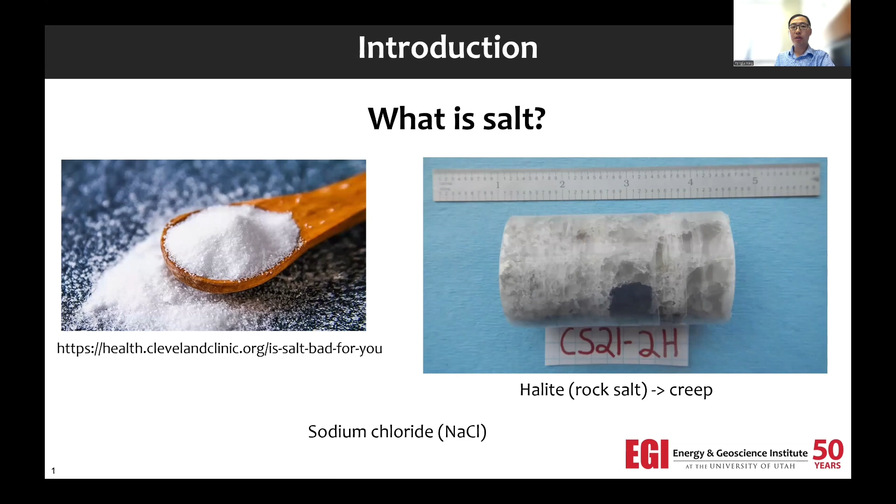So first question, what is salt? Is it what we eat every day? Yes it is, but it's in the form of rock. We call it halite or rock salt. Its major component is the same as what we eat every day - sodium chloride, NaCl. One of the most important features of rock salt is that it's easy to creep compared to other rocks.

Here is the Paradox Basin. It's in Utah and Colorado, and the area we investigate is in Utah. One unique thing about this Paradox Basin is that it has a setting of salt-clastic cycles. If you look at this figure, you can see this layer of salt, then followed by a clastic, another salt, a clastic, and repeating like this. So we talked about salt, halite, before. The clastic is composed of sandstone, siltstone, mudstone, etc, as well as usually where hydrocarbon forms.

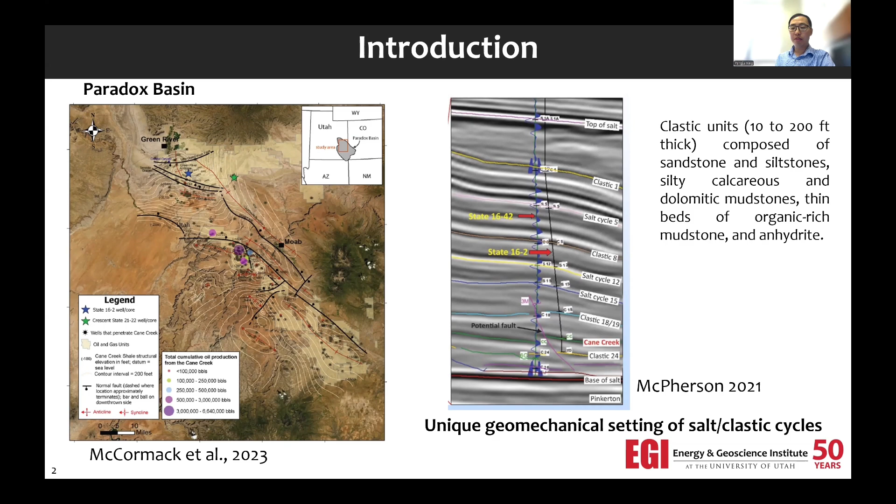Due to the unique setting of these salt clastic cycles, there are a lot of drilling programs. Here we investigate the one well drilled in this basin, and this project is supported by DOE, and some of the funding is going into the drilling of this well.

So we can see that there are drilling issues during drilling the well. After 23 days of spud, there's drill pipe stuck at 6,022 feet, and they start to drill a sidetrack. The sidetrack means they drill another branch. But after drilling the sidetrack at day 43, only 2 days later, the pipe got stuck again at 9,273 feet.

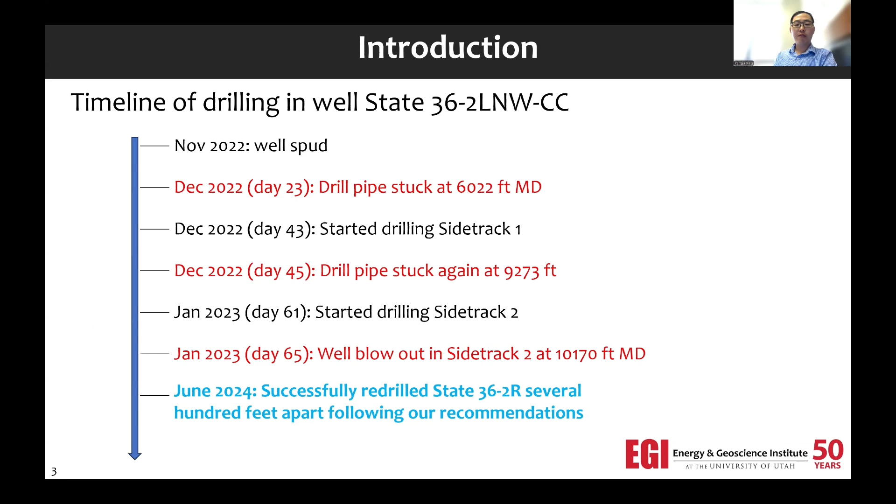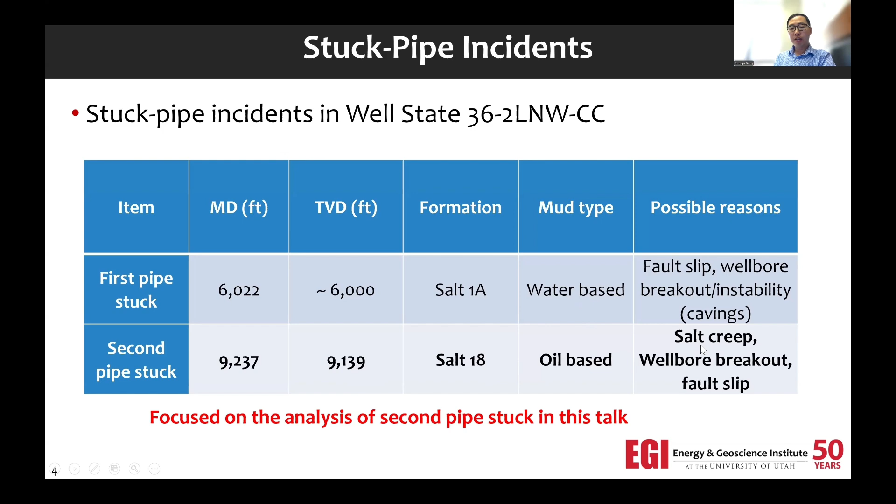So basically there are 2 pipe stuck incidents in this well, as I mentioned. The first one is happening at 6,000 feet, and the second one is deeper, around 9,139 feet TVD. They use 2 different mud types - the first one is water-based mud, and the second one is oil-based mud. Here we focus on the analysis of the second pipe stuck in this talk.

This figure shows the drilling during the second pipe stuck. You can see the salt clastic layers, and the pipe stuck at salt 18, and we believe there are three mechanisms that can contribute to the pipe stuck.

The first one is borehole creep or shrinkage. The borehole shrinkage means the borehole size becomes smaller, and then it causes pipe stop. The borehole shrinkage is caused by the salt creep. The second one is wellbore breakouts - when under compression, your breakouts produce some small pieces of rock that fall into the well, and if it can jam the well, it causes pipe stop.

And the third is fault slip. Somehow the structure, when it interacts with the drilling, it can easily slip and cause the pipe stop.

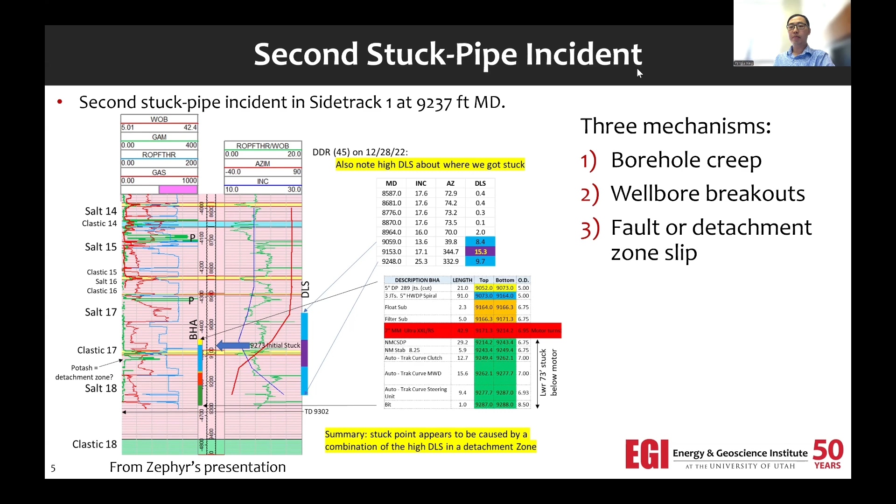First we can look at one of the drilling parameters during drilling - it's the PVT total mud. The PVT total mud means the mud, they monitor the mud at the surface. Ideally, as you're circulating the mud, you shouldn't gain too much or lose too much. But here, starting from 8,700 feet, you start to gain a lot of mud, meaning something happened.

Presuming the calibration is correct, the gain may suggest the borehole shrinkage - the borehole becomes smaller, then squeezes the mud out. This can be due to the creep, or it could also be another reason, like you enter a zone with some fluid coming out. But creep is one of the reasons we call this.

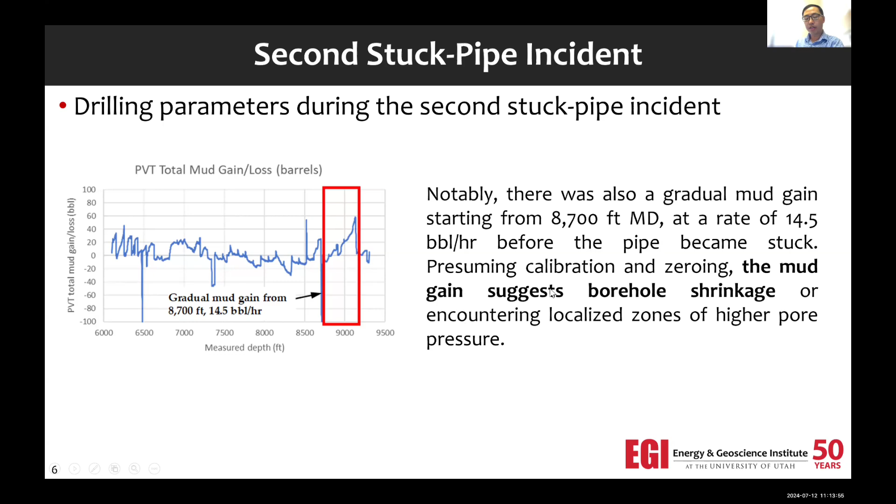Here is one 1D very simple analytic solution. You can calculate the borehole shrinkage. So R is the current radius, and R0 is the original radius, and here it's related to your creep.

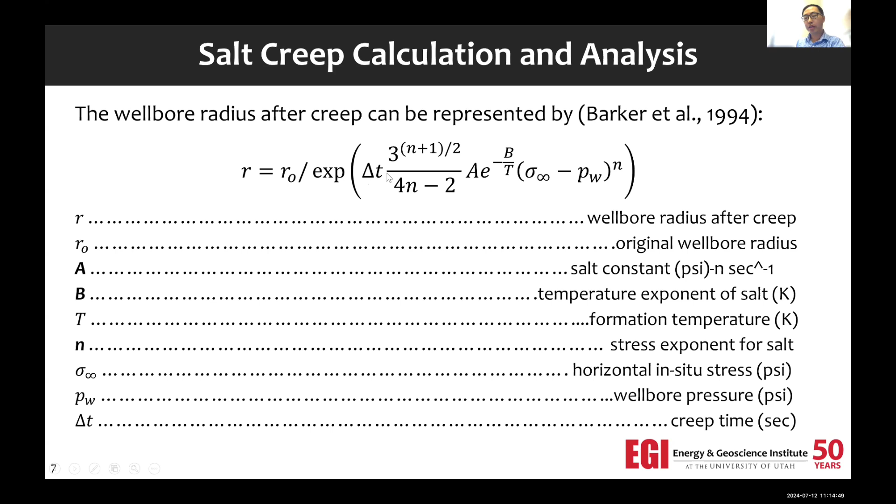So A, B, N are related to the salt properties. A and B are related to temperature, N is related to stress. Delta is creep time. This sigma is in-situ stress, and PW is wellbore pressure. So basically, you can calculate how much your well will shrink based on these parameters.

But first thing is you have to determine the constants A, B, N that are related to salt properties. But we don't have any core samples in this well. Fortunately we have lab creep tests for the cores from the nearby wells.

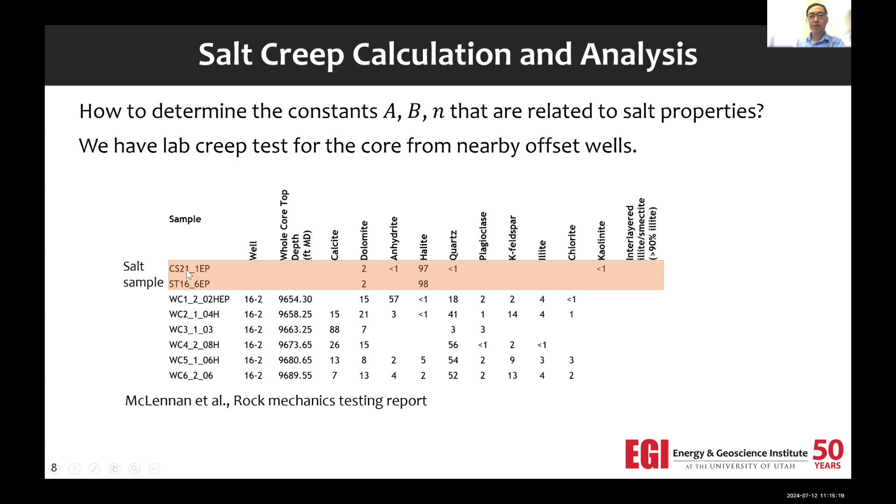We have two samples, they did the creep test. Here's some data from one of the samples. How is the creep test done? Basically, first you apply a 600 psi confining pressure, then you do multiple cycles.

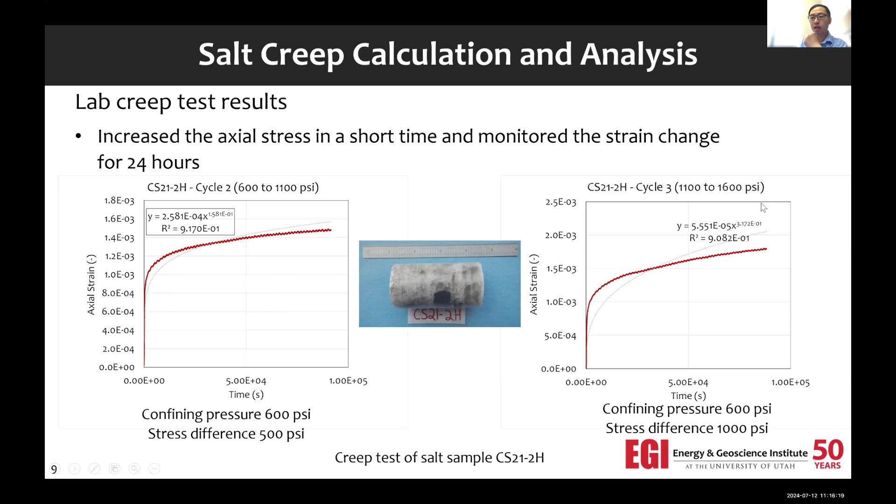In the first cycle, you increase axial stress from 600 psi to 1,100 psi in a very short time, so the stress difference is 500 psi. Then you keep the stress constant and wait, monitoring 24 hours for the strain change. In the next cycle, you increase axial stress from 1,100 to 1,600, then wait another 24 hours and repeat.

So we have this from stress difference of 500 psi up to 4,000 psi, and you get this data. The creep strain can be expressed like this. We know the strain rate, we know the stress, and we know the temperature when we did the experiments.

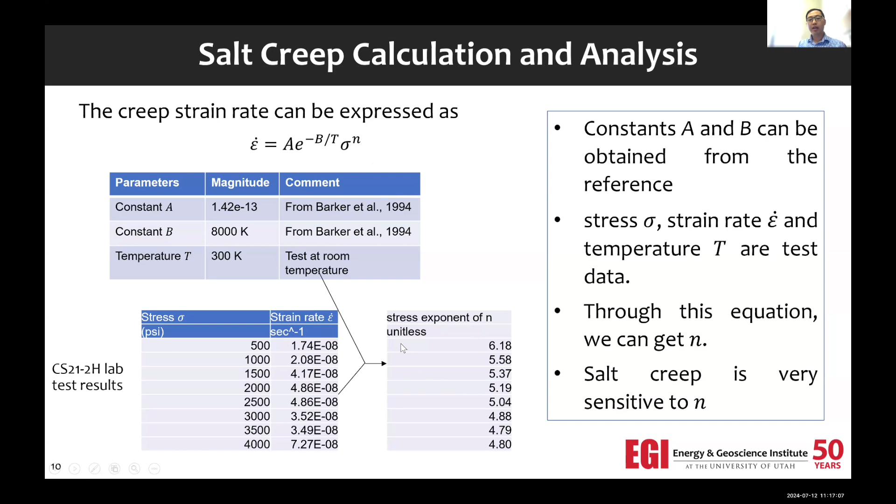A and B I just copied from the reference, and the only thing we can calculate is N, the stress exponent. You see it's a power law, so it's very sensitive to this, but we can calculate it based on this experiment data.

Then we substitute these parameters back into this equation. With A, B, N -- N is related to your stress difference level, and because we have different stress difference levels, we calculate N based on this stress difference.

We just do some interpolation, and also the temperature here is the reservoir temperature, which can reach 170 degrees F. So after you substitute all these parameters in, what you get is the current wellbore radius is only 90% of the original one. So it can shrink from 8.5 inch to 7.6 inch at this 9,000 foot TVD, so 10% shrinkage.

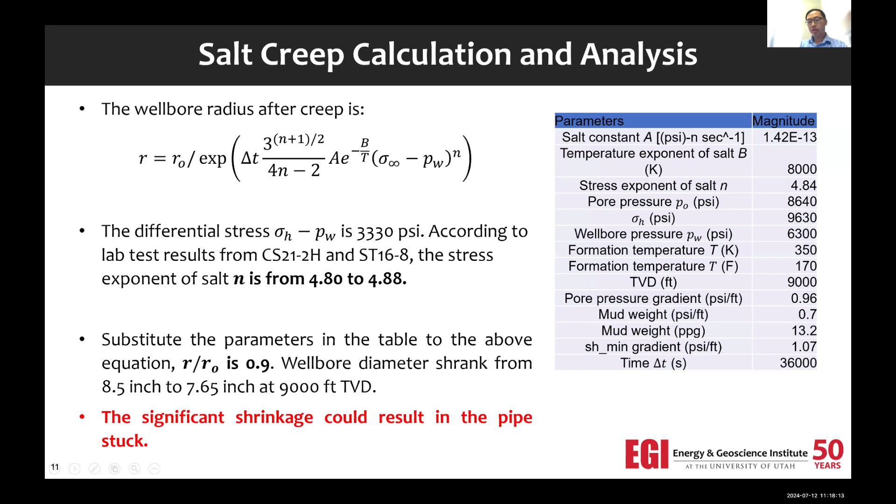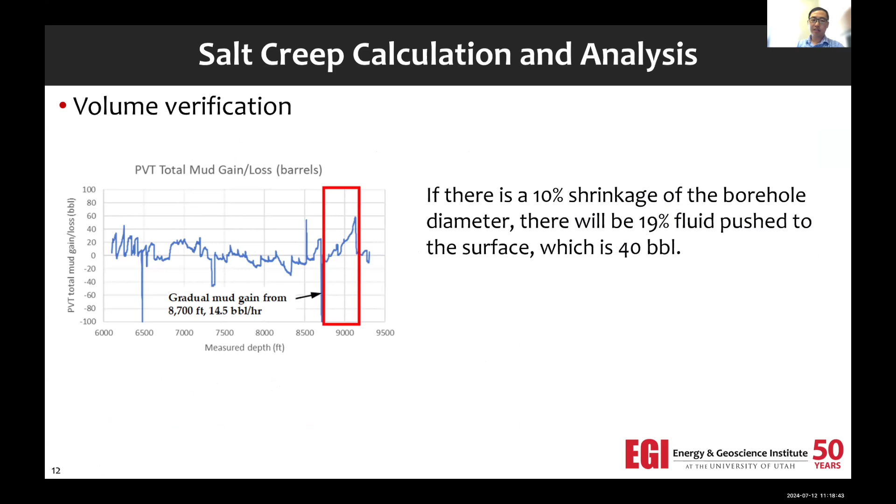So this could result in the pipe getting stuck. And if we go back to the chart I showed before, we see there's about 60 barrels mud gain, and I calculate the volume. If 10% radius shrinkage will cause 19% fluid to be pushed out to surface, which is around 40 barrels -- so yeah, just to cross-validate each other.

So next, if I set a threshold -- if you have 10% shrinkage, you have a problem -- then what mud weight do you need to prevent this 10% shrinkage? This chart can answer this question.

So this solid line is the creep, the mud weight required at different temperature levels. The higher the temperature, the more severe the creep. The red one -- the real temperature at 9,000 feet is 170, so the blue line is 170 degrees F.

So this is the required value, and the dashed line is what was actually used. The actual mud weight used at this 9,000 foot TVD is 13, but what is required on the blue line is about 13.4, so it's lower than the required value, and that's why this could cause a problem.

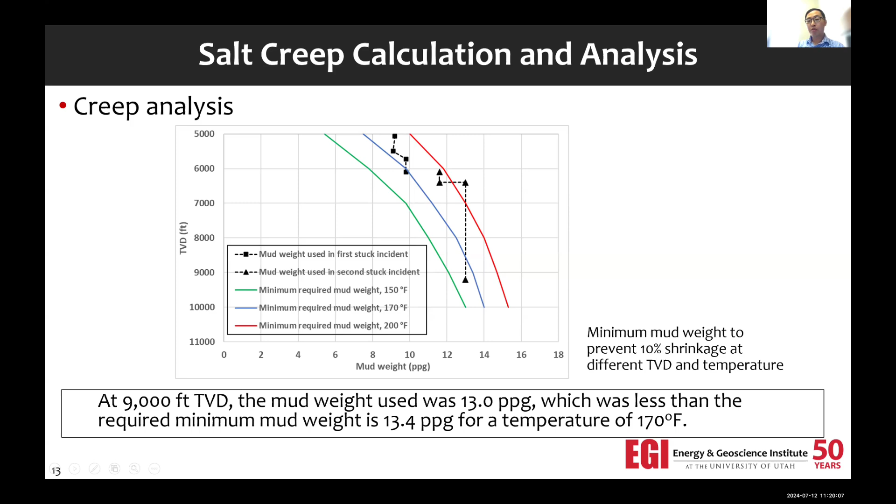So the previous analysis was based on the creep equation and the lab data. Next we also have a lot of data from the nearby offset wells, and the amount of creep is related to the actual mud weight. So if you put more mud weight, you have more support, then you have less creep.

So we have this data, and also we have the caliper data. The caliper data is -- when they finish the hole, they put a tool down hole, and they can measure the size of the borehole.

Here is the plot. The vertical axis is the ratio of the borehole size over the drill bit size.

The drill bit size is the original size. You drill it at original size, but due to some reason, like creep, the actual size becomes smaller. So R0 is the base size, the original size of the borehole, and R is the current one.

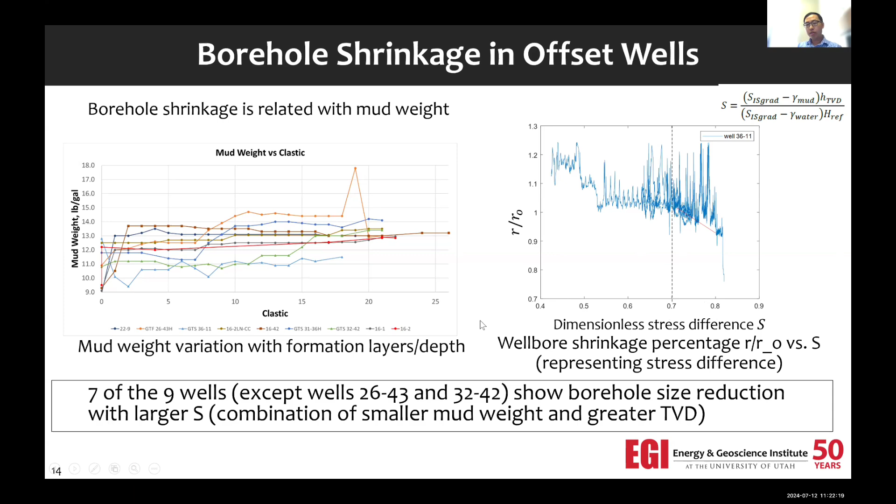As you increase S, you can see a clear trend: the borehole is reduced in size. For nine of the wells we have this data, seven of them show this size reduction.

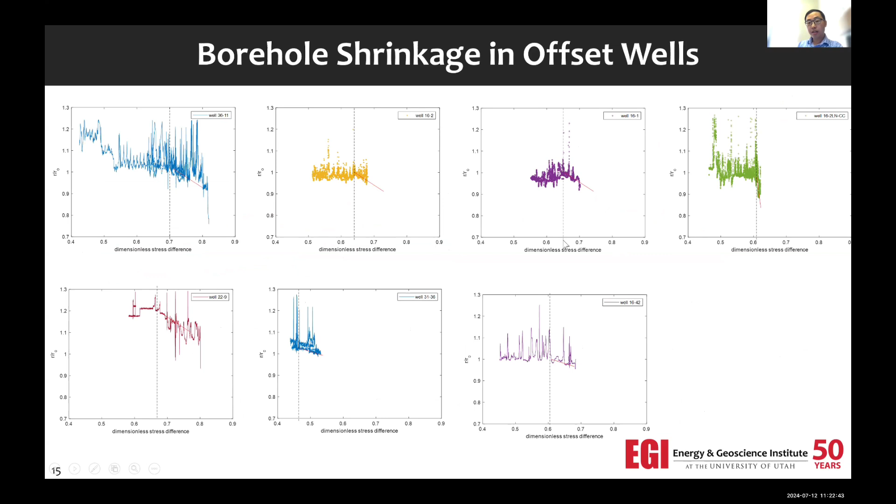I put these seven here. They all show that once S exceeds some value, they all have a reduction in borehole size. This is highly due to creep.

If you set a criteria saying we don't want this size reduction, and we want this ratio smaller than 0.6, then we have this plot showing the minimum amount of mud weight to keep S smaller than 0.6, at 9,000 foot TVD.

The required amount is 13.2, and remember what we calculated before was 13.4. What we actually used was 13. So the used value is not too much lower than required, but it's still lower.

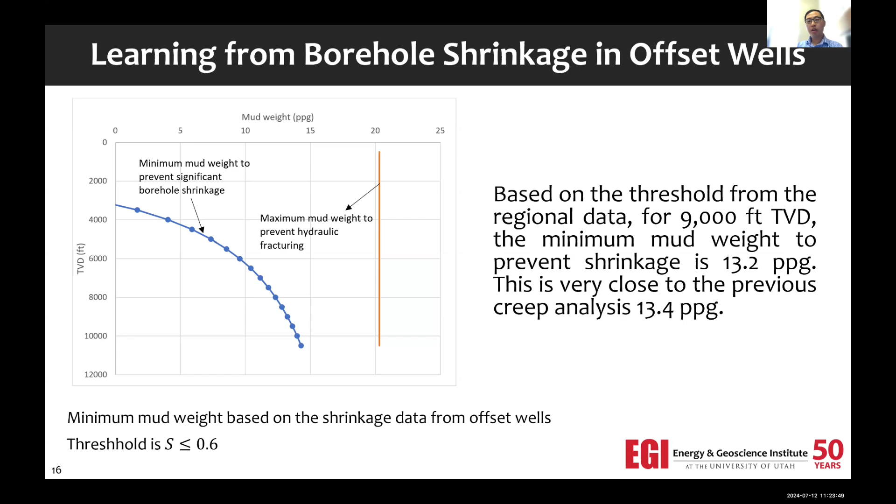If you consider the uncertainty, it could give you some problems and cause borehole shrinkage and stuck pipe.

The next possibility is breakout. Look at this figure. Under compression, these breakouts happen.

Small pieces of rock could fall into the hole and jam it. But it's salt, which is pretty ductile. However, salt also has low strength compared to other rocks.

The UCS we measured in the lab is only 3,600 psi. Typical rock has close to 10,000 psi, so it's relatively low strength. So breakout could happen.

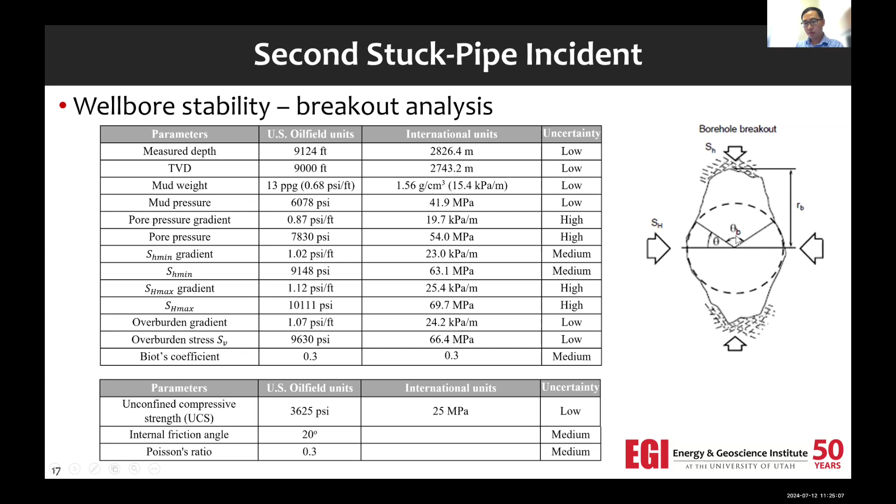Then we calculate the breakout angle. The breakout angle means this angle here. The larger this angle, the more severe the breakout could be. So we calculated the breakout angle.

Here we show two scenarios with two different Biot's coefficients, one 0.3, another 0.4, typical values for this kind of rock. It's very sensitive to the Biot's coefficient.

If the coefficient is 0.3, the breakout width is around 70 to 80 degrees. If the Biot's coefficient is 0.4, it could increase to 100 degrees.

We set a failure threshold of 75 degrees. If the breakout width is greater than 75 degrees, it could be a problem in a vertical well, and 60 degrees for a horizontal well. The horizontal well has a lower threshold because it's difficult to carry out all the cuttings.

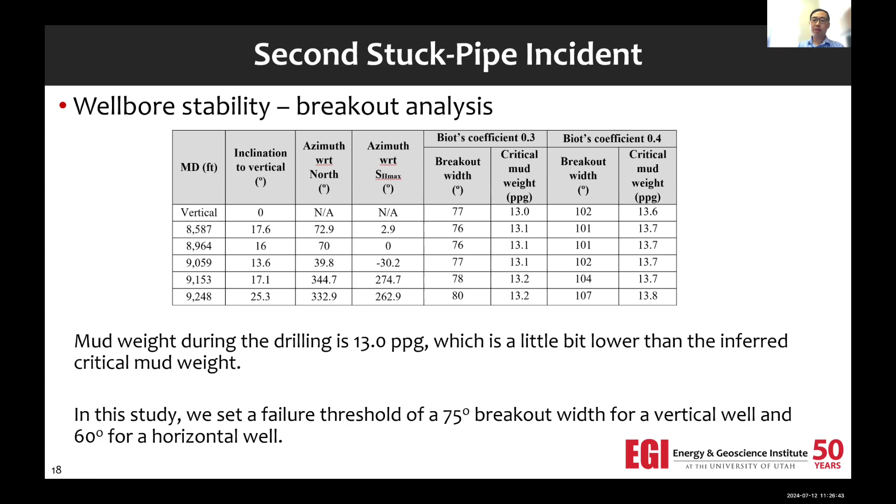So again, if the Biot's coefficient is 0.3, the critical mud weight is around 13. But considering some uncertainties, you still want to put your mud weight higher than this to keep it safe.

The third reason is fault slip. Here we can see there are some fractures intersecting with faults, inferred from seismic data, intersecting with the well.

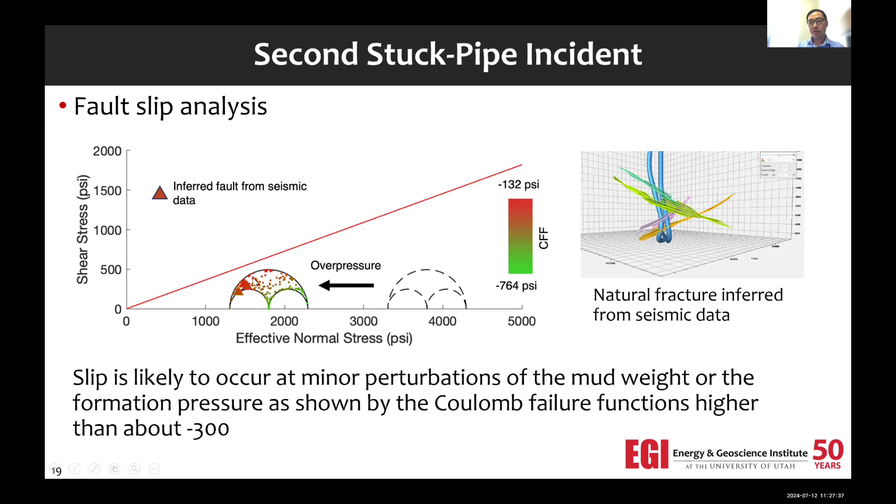My colleague Kevin McCormick applied this chart. The triangle here represents the azimuths of these fractures, and it's in a more dangerous zone. If it coincides with a higher pore pressure zone, it's easier for these fractures to slip.

So yes, let's come to conclusions. The three mechanisms, salt creep, wellbore breakouts, and fault slip, are all potential individual or collaborative contributors to the well instability experienced in the stuck pipe incidents.

We don't know which one is the real reason, to be honest, but we believe all three can be contributing, either individually or collaboratively. We just don't know, so we put all the things together.

But the important thing is that all three failure mechanisms are associated with lower mud weight. Analyses show that the minimum required mud weight is above 13 ppg, pound per gallon, and the actual used is 13. But you have to consider the uncertainties of all these analyses.

So we recommend increasing the mud weight to 14 pound per gallon at the deeper location, and it will mitigate the risk of well instability. If you increase mud weight, you have more support, your borehole shrinkage will reduce, the breakouts can be reduced, and the fault slip can be reduced.

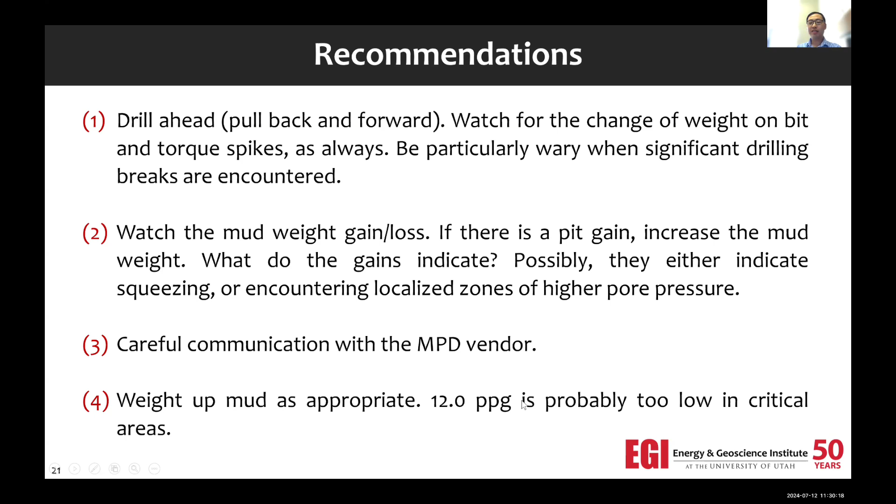And careful communication with the MPD vendor, MPD being managed pressure drilling, and weight up as appropriate. 13, 12 is not high enough.

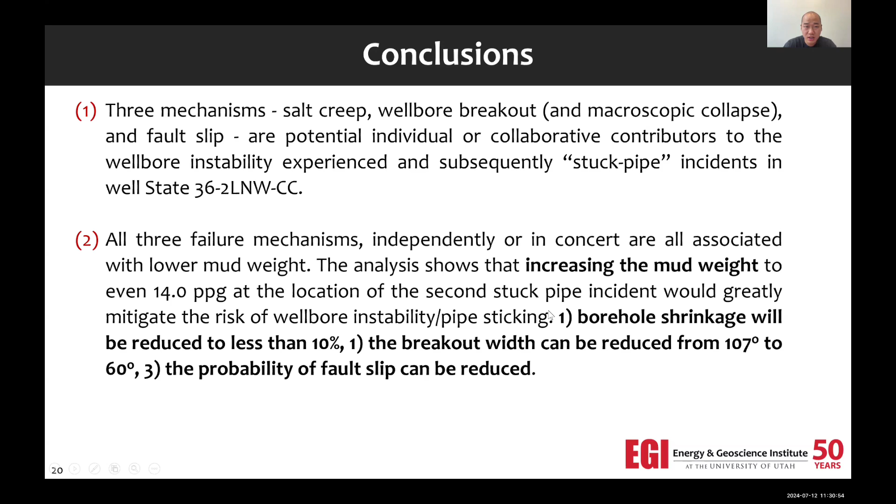All right, thank you, Dr. Xing, for this very nice presentation. We have a question in the chat from Umesh Prasad. Would you like to unmute yourself and ask, or you want me to read out the question? Yes, my name is Umesh Prasad, just by the way.

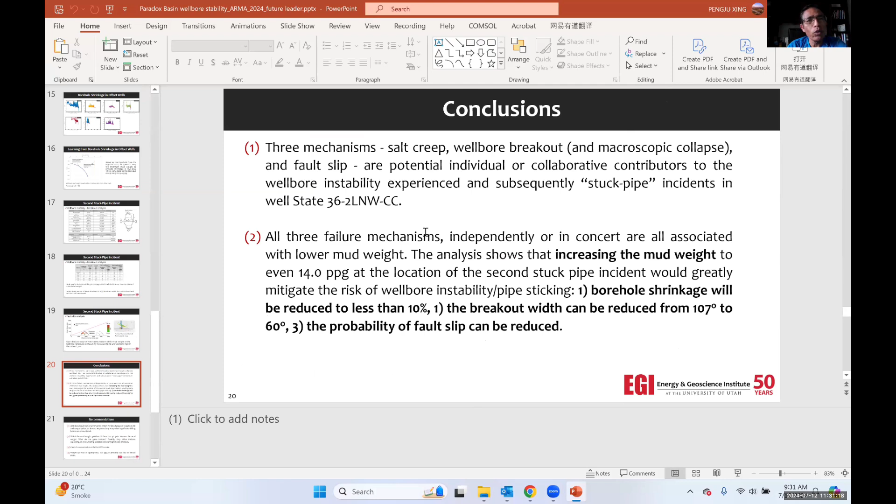Okay, my question was, in the salt, sometimes we see dissolution. In one of the two wells you mentioned, one was drilled by water-based mud and the other one, yeah, water-based. So was there any dissolution instead of shrinkage or creep?

Very good question. So in the first stuck pipe incident, we think it used water-based mud. We think that because the circulation rate is low, so we assume that when you dissolve the salt, it's in some part, because it's not uniform salt, it's salt clastic. So at the boundary, there's maybe some pieces of rock falling into the hole, so-called cavings.

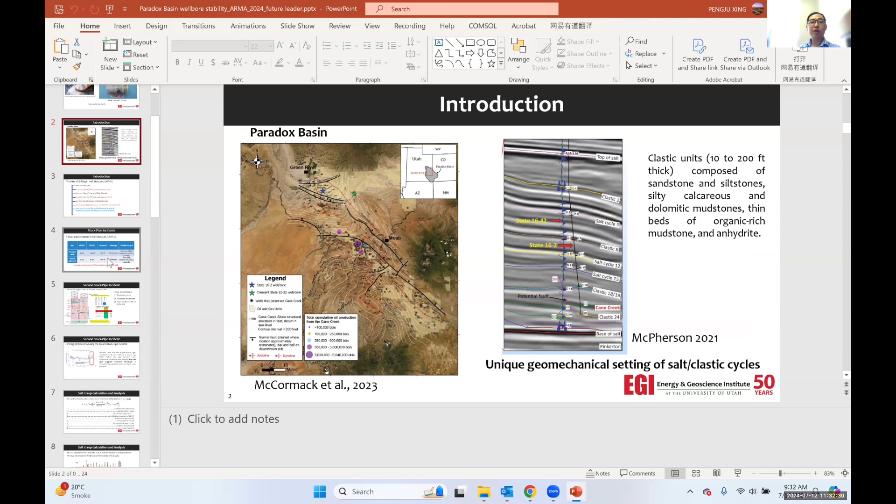And that's fine. It has low circulation rate, and it may not have enough power to carry these cavings out. So this is probably the reason for the first stuck pipe incident.

Yeah, another quick question on cavings, also put in the chat, was: conventionally in the lateral section, for example, Mark Zoback's book considers the threshold level of breakout as 30 degrees, but you assumed 60 degrees. Was there any reason that you may be able to evacuate those breakouts or cuttings? Why did you use 60 degrees instead of 30 degrees?

You mean in Zoback's book it's 30 degrees? Yeah, usually, petroleum geomechanics says in the vertical well your threshold should be 90 degrees, but in lateral, 30 degrees. But in your statement I read some different value. I think I got it from somewhere, I don't remember the reference. Yeah, they got 60 degrees, I just don't remember what the reference was.

That's too high, it should be lower. Okay, that's fine. Yeah, 30 degrees, you mean the whole thing or the half? The whole thing is 30 degrees. In the lateral section, because you cannot evacuate the cuttings efficiently, there is always some inefficiency, the threshold level of breakout is considered much lower, only 30 degrees. And in the vertical section, 90 degrees, you can evacuate easily. So that is the rule of thumb, but it's not absolute, so it's okay. Yeah, it's just like, if it's 30 degrees, then you have more problems.

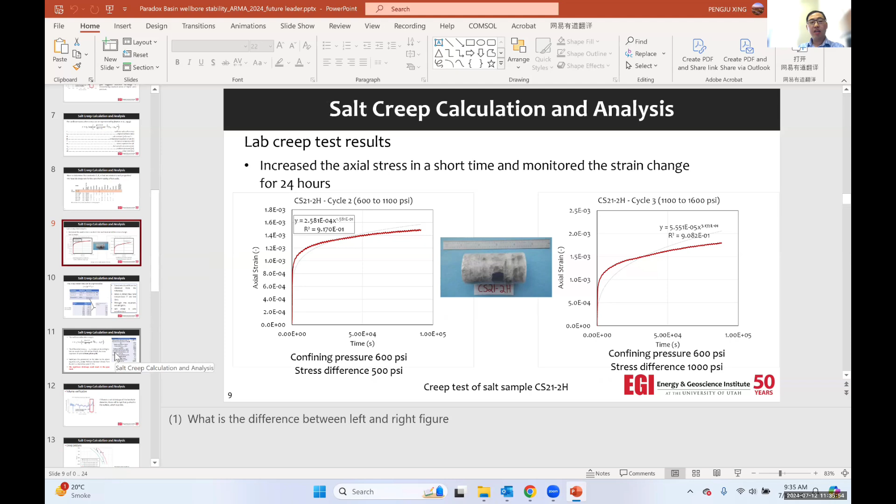We have a colleague who made an estimation of the stress. He thought it's actually a strike slip regime. But all three stresses are very close - the overburden, horizontal max, and horizontal min are very close to each other, not too much difference. Maybe in the caprock and salt it's different.

We have a colleague who investigated this. He still believes one is strike slip, but these three stresses are very close to each other. Is that your question?

Now looking closely at the stress gradients, they are close - not totally isotropic, but there are slight differences. You'd expect not to put too much difference in, but actually you don't know. It's difficult to measure SH max.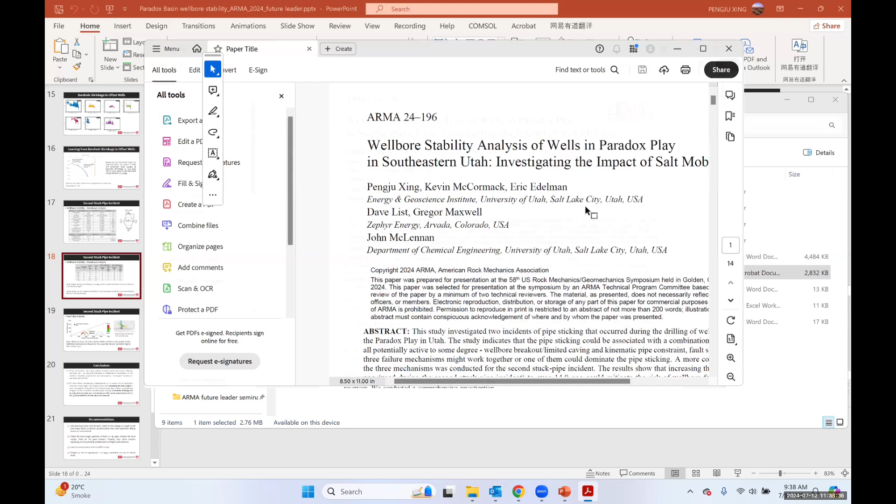Second question from Umesh Prasad: you are one of the experts, so that's good. Let's find the good reference. Let me look up that paper - actually, you can look at this reference.

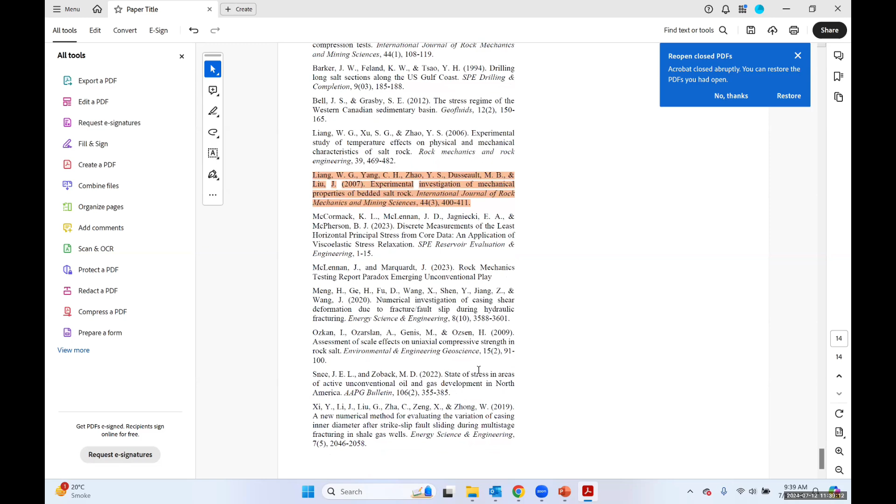Was this paper presented at the last meeting in Golden? You can find it in this reference. Yes, I presented something similar in Golden. I may have missed that, there were so many sessions.

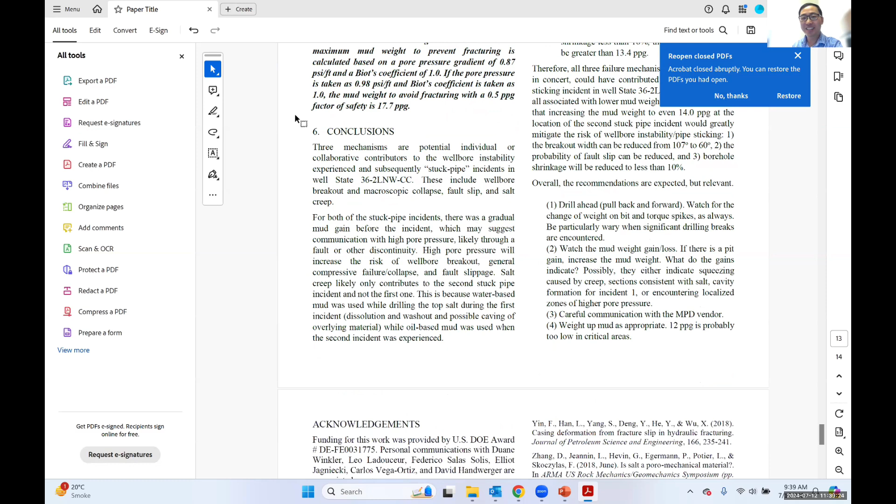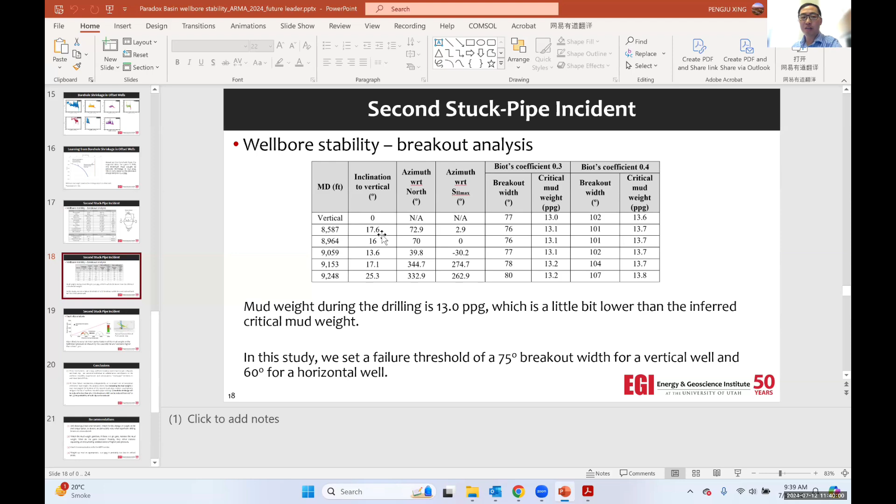Hi Pengju, I have one question. When you calculate the mud density for wellbore stability to prevent collapse, what kind of model do you use? Because this salt has strong viscoelastic or viscoplastic performance - just an elastic model? You can find it, I use the Zoback tool to calculate.

My concern is they do not consider any viscous behavior in this breakout calculation. If you consider that, it might significantly change your mud density to maintain wellbore stability. I know, so it's elastic calculation. The UCS is low, but it's very ductile, so it's maybe not that easy to get breakouts.

You also have a transient property change of your soft rock, and maybe the longer time you drill, your safe mud window is actually shrinking or expanding all the time. But how do you incorporate this factor in your estimation without including the viscoelastic property in your modeling?

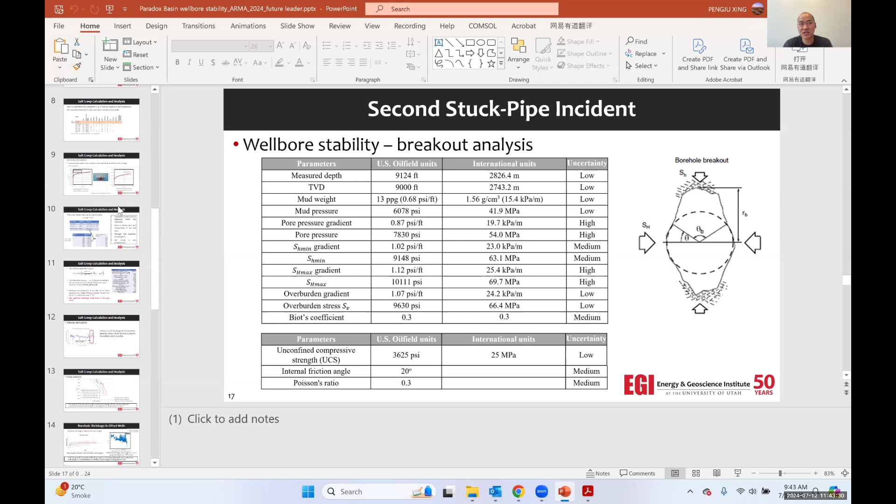Dr. Xing, I have a question about the mechanism behind this creeping. Do you know if it's like a brittle creep, or is it pressure solution that induced the creep? Pressure solution - if you put something soluble in water and apply a lot of pressure, combining stress and so on, there's a thermodynamic effect where the solubility will actually increase.

So even... Oh no, it's oil-based mud, so it cannot dissolve the salt. So they changed the mud type after this, because they start to enter the salt. Above 6,000 feet is mostly non-salt. Salt 1A is the first salt formation they entered, but they got stuck here.

But after that, they changed the mud from water to oil. So you have very little dissolving - you cannot dissolve too much salt during this second pipe stuck incident.

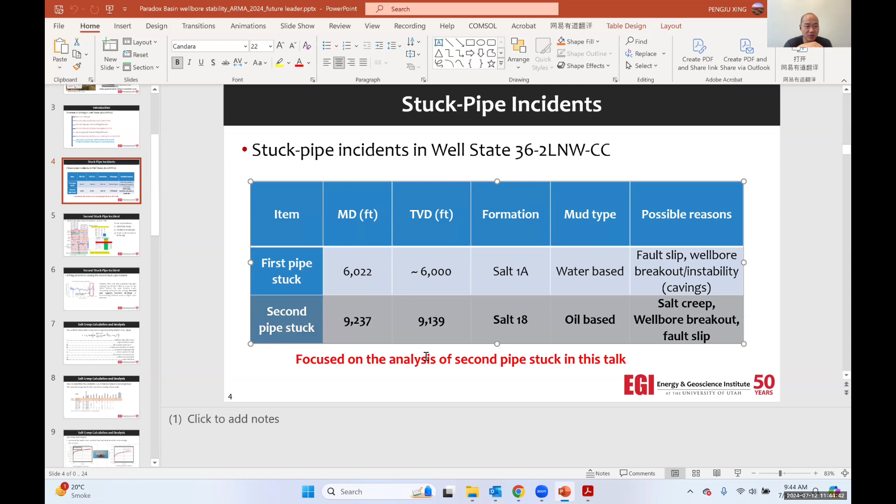I see, so the creep mechanism you see here is mostly like brittle creep? Yeah, it's still hard for me to imagine. So for example, in the creep model you used on slide 7, I'm just trying to figure out what is the creep mechanism.

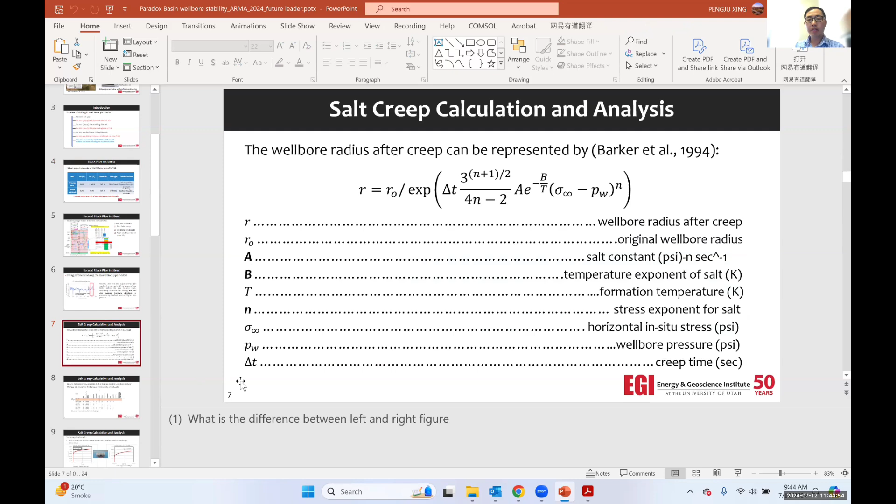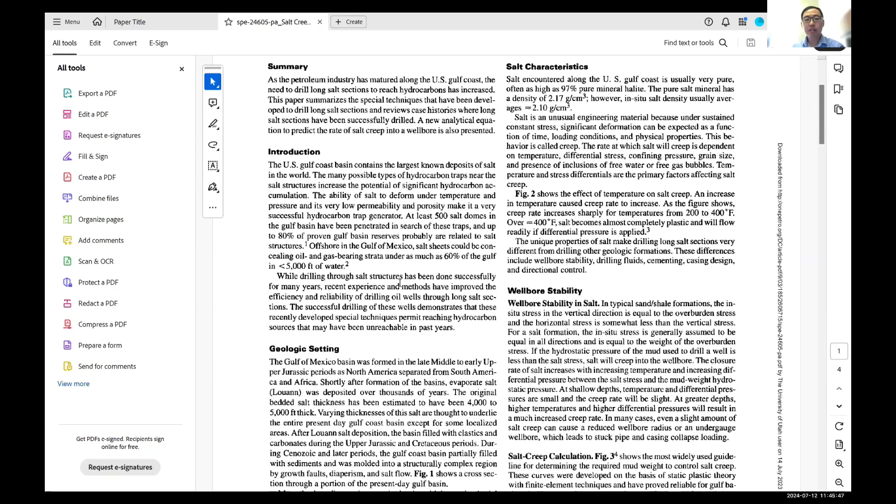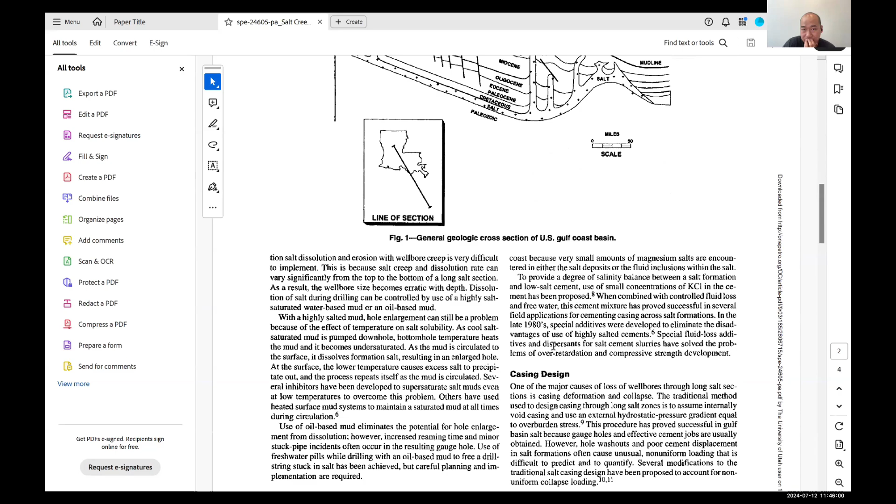Let me find this paper. Let me see here. Let me stop a while, please let us discuss. It could be an empirical model. Let me show you this paper. Salt creep calculation.

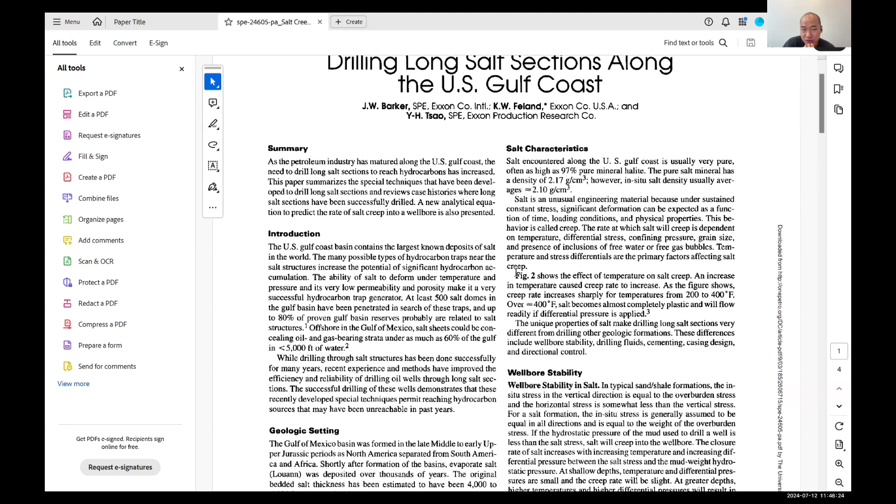Dependent on temperature, differential stress, confining stress, grain size, presence of inclusion of free water, free gas bubbles. Based on static plastic theory, with finite element techniques.

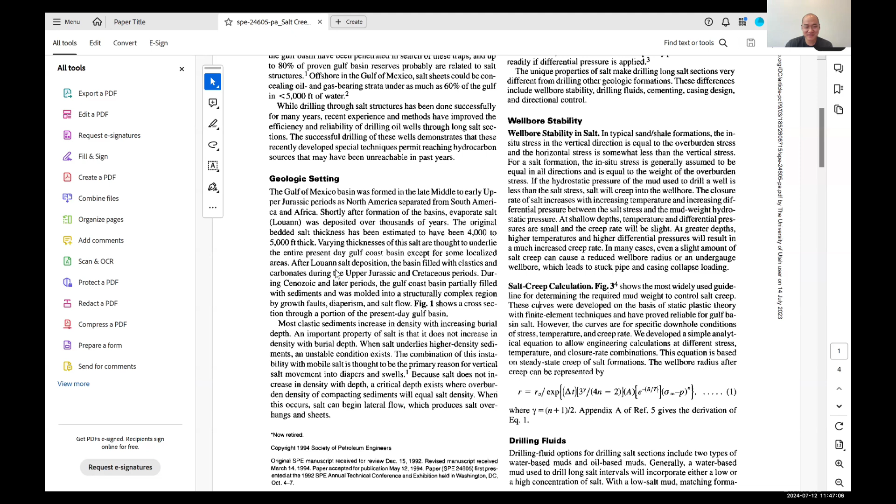I see, I think this is more or less empirical. Oh, there's another paper, they reference how to derive these equations. I can check this out later.

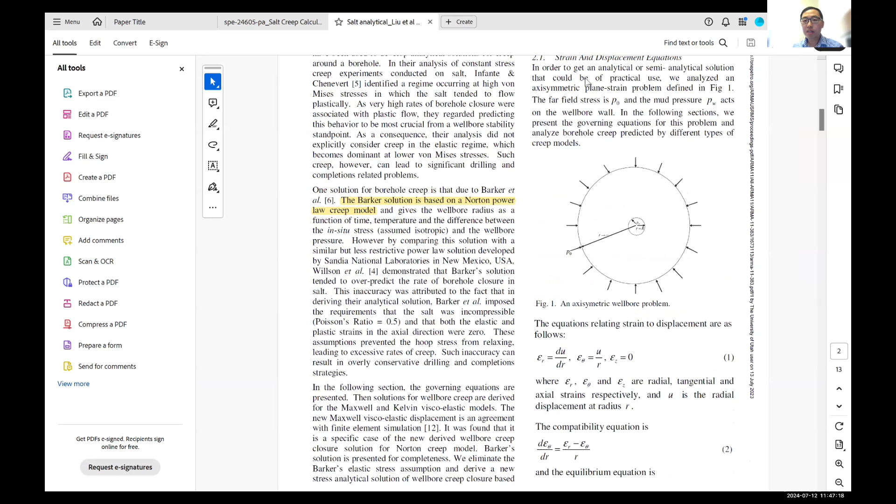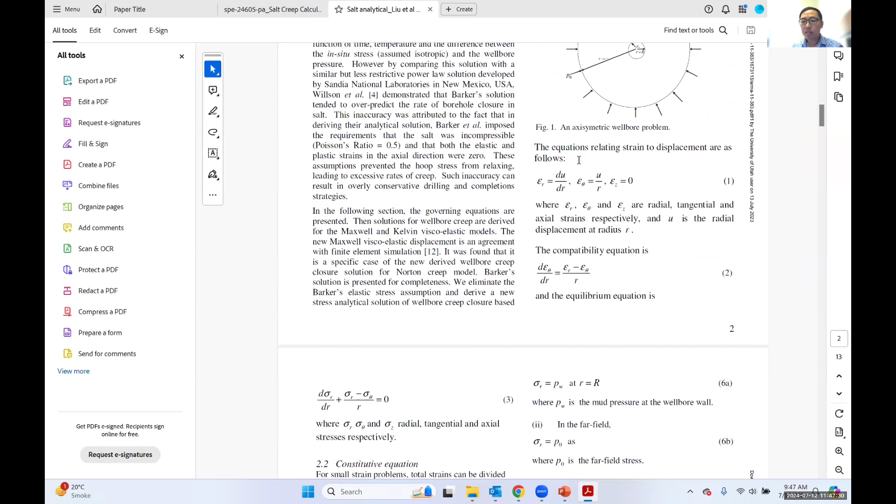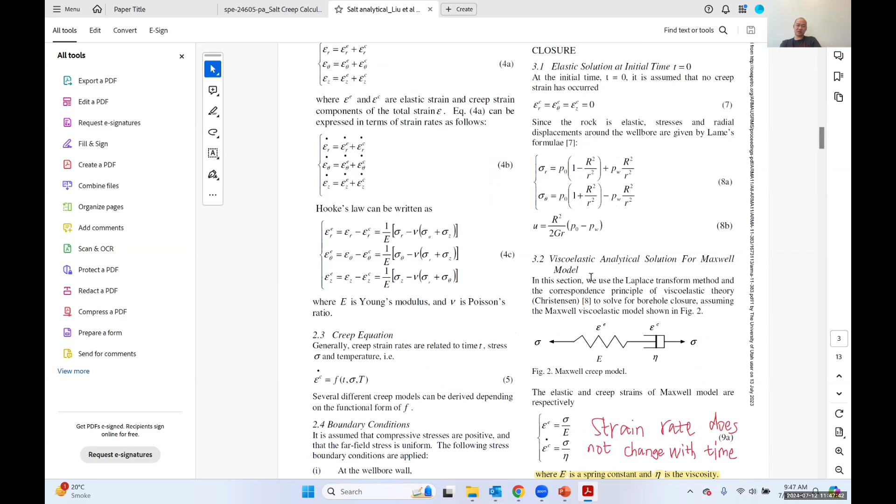Do you see this one, this paper? Yeah, so it's a power law creep model. See this? This is how the creep shape... I think they fit it in a power law.

Maxwell model, right? It's a spring and slider - a spring and one dashpot. Okay, cool, thank you.

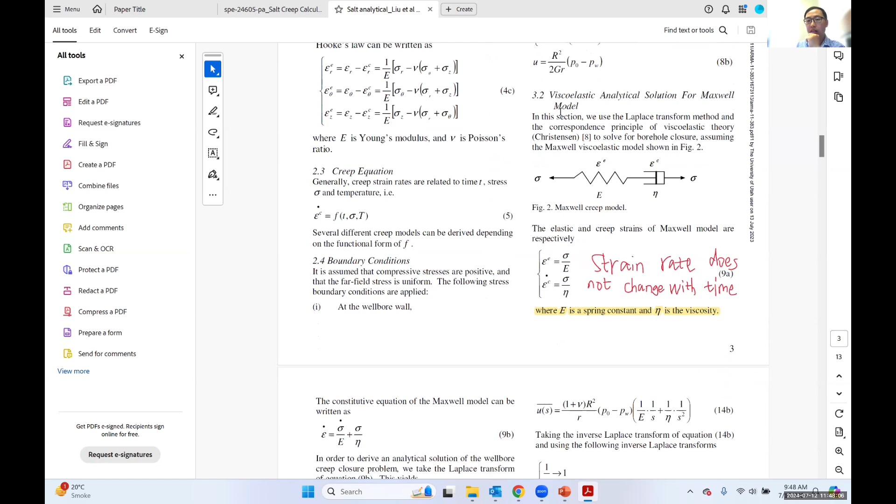Do you have other questions?

Oh, I see Peter here. Peter, thanks for joining us. I'm here, I'm sorry I missed the very first part. I'm not sure why, Zoom wouldn't let me in, but Wei sent me another link and I got in. So I want to thank you, that was a very interesting talk, and glad to see so much commentary afterwards.

Very good comments, good discussion. I think these future leader webinars are terrific, very informative. They bring everybody up to speed on what you're doing. I think it's one of the nicest aspects of ARMA. To be honest, I like this small group, so I had more discussions. They're not small by design, they're just small because the audience is limited to ARMA members. So it's really a benefit of ARMA. I think the discussion always reflects that, and that's good.